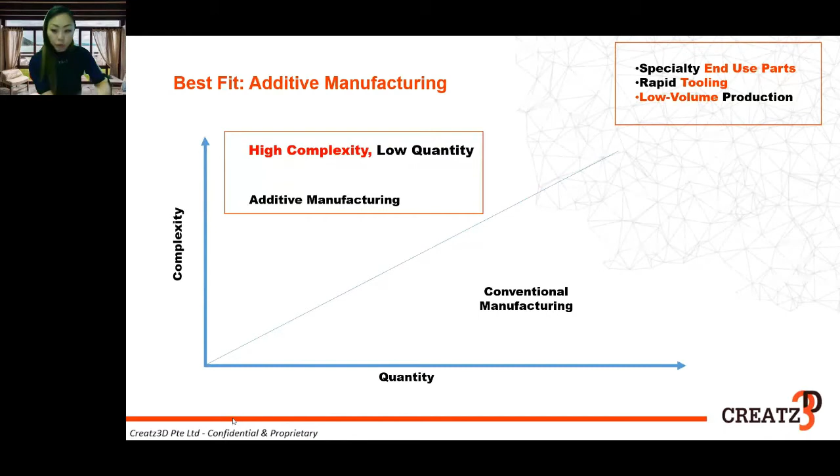Okay, so just to walk through the stages of product life, usually this is how we use additive manufacturing. In the past, people believed additive manufacturing can only be used for concept designs, prototyping, for very low or non-functional applications. But what we see today is there's a lot of demand coming from more test models, functional testing, even jigs and fixtures. I think jigs and fixtures is one of the biggest applications we see in recent years, with customers coming to us looking for low volume productions and all these things.

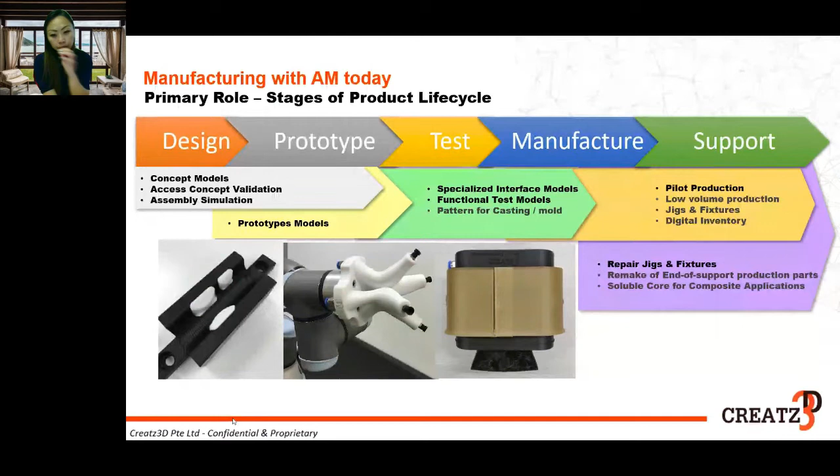Okay, so I'm going to go very quickly into three stories. The first story will give you, or at least the customers we're involved with, a changed mindset about what 3D printing is. The second story is we actually deliver more than what the customers expect. The third story is mainly on how we simplify the whole tooling request from our customers.

So quickly, I'll go into the first case study. We work with this company called Fidel Engineering. They are basically a tooling house. They produce a lot of jigs and fixtures, and they specialize in aerospace industries. So they came to us asking for a solution on how AM can be integrated for metal, because they're spending a lot of money just on mold forming for low volume, especially for aerospace industries.

So we came up with some of the pain points: it's very labor intensive, the cost is very high because mainly they have a lot of skilled workers, and the lead time is usually very long. They are restricted in terms of mold designs, especially for progressive stamping tools, where they need multiple molds. And if the metal sheet is very thick, the mold gets destroyed very quickly. So the requirement for them is how we can integrate AM or redesign their process for low volume production, and bring down the cost of tools as well as the time to market.

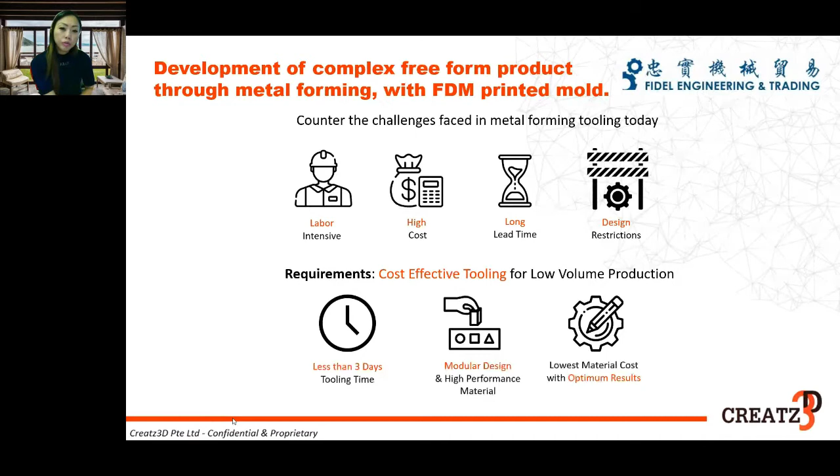So the top section talks about the traditional way of how they do their mold stamping - the molding, how they produce the mold. From machining all the way to forming the mold takes around 7 days, and they need 4 different types of skilled workers to do this. The process is actually very skill dependent, and if one of the workers is down, they're trapped with a longer lead time.

Whereas when we do the tool designing, basically we only need one designer and one operator. That's the maximum hours required.

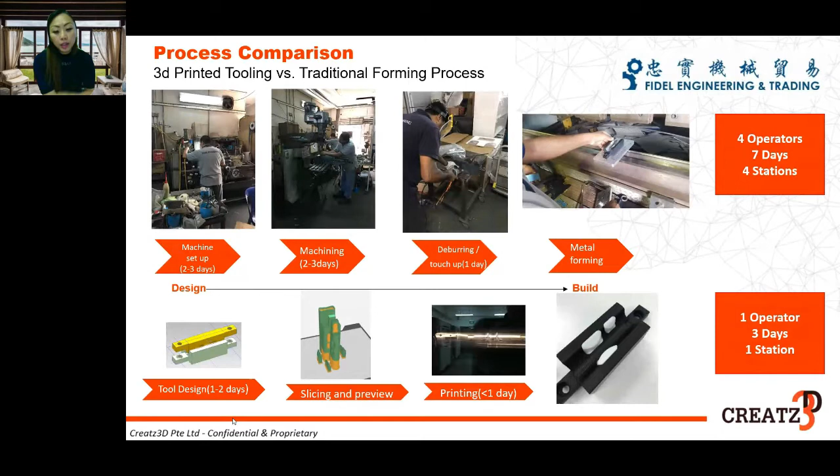After listening to what they want, we use Stratasys Fortus machines to produce this mold. The whole idea is to produce a modular mold - this is the final design. We understood that a certain section of the mold wears off very easily, and usually for whole metal molds, they need to dispose of the whole thing, which costs them. So we thought, why don't we design a modular insert? The customer was quite surprised that AM can actually do this - it had never crossed their mind that they could do inserts, or that it's usually very expensive to do this.

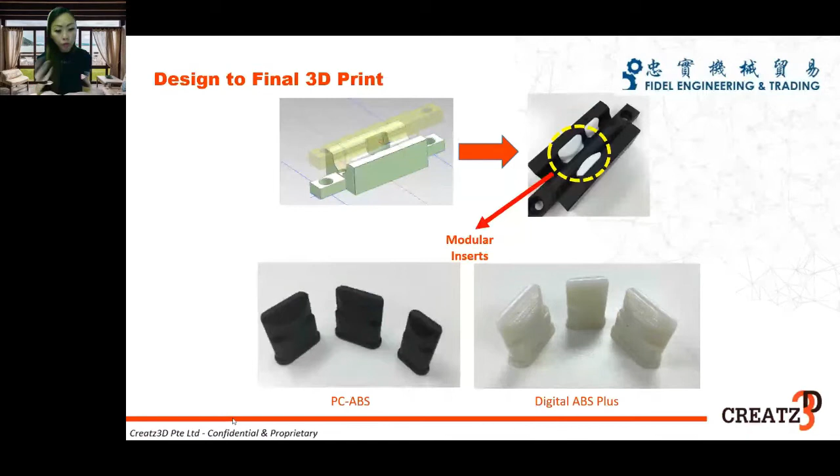So we produced two types of material inserts, basically to test which one would last longer. PCABS is a real thermoplastic - this material lasts longer, but due to its ductility, we may not get the curvature as much as we want, so PCABS is definitely not the best material. Digital ABS from Stratasys PolyJet machines definitely gives better forming on the sheet, but it's a little too soft. Overall, it's really all about the choice of materials. This application is really very interesting.

We did about 100 shots of stamps, and then we noticed that the mold starts to wear off a little bit, but customers are very happy because the parts printed are really within their own tolerance and very ideal for their own low production runs. Usually they only require maybe 40 to 100 sheets. During this whole process, we noticed that PC-ABS is probably not the best material to go for because it's too ductile, and we noticed some spring back. If given a choice again, I would rather choose polycarbonate, which is a more rigid material for these applications. But the whole concept is definitely adoptable in the whole process.

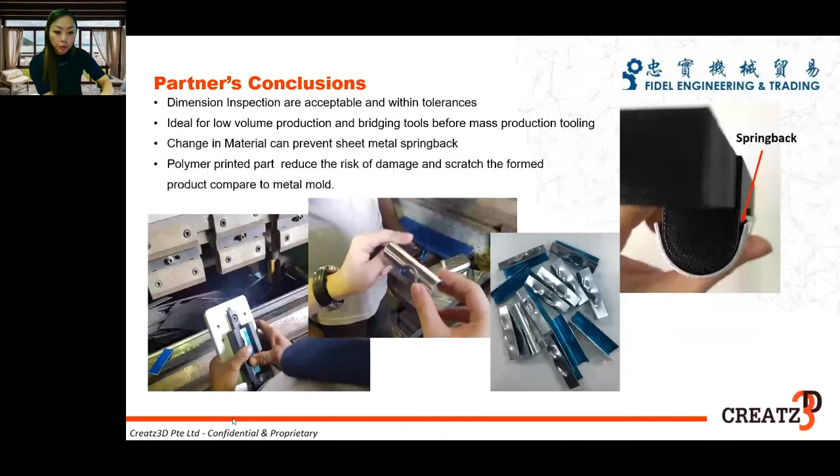So the next story is mainly on Universal Robots. Universal Robot approached us for a collaboration, back then about 4 years ago, so this project is quite some time back. They had a new UR10 back then, and they wanted to design a suction gripper for food packaging, but had totally no idea what they could produce. So they came to us and asked us to do a design for them. After understanding what the UR10 is all about, and that it can turn 360 degrees, we decided to do a multi-axis suction gripper for them.

Traditionally, this is how end of arms look like. It's usually very bulky, very heavy, with a lot of sharp edges, very rigid, and not so adjustable. Usually the payload capacity includes the whole end of arm weight. So for example, about 10 kg payload, and easily the end of arm will take about 3 or 4 kgs. So part of the requirement is to reduce the payload itself.

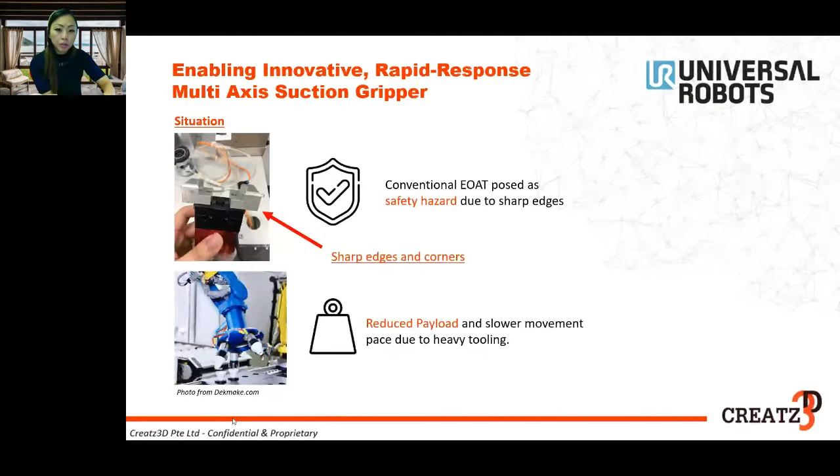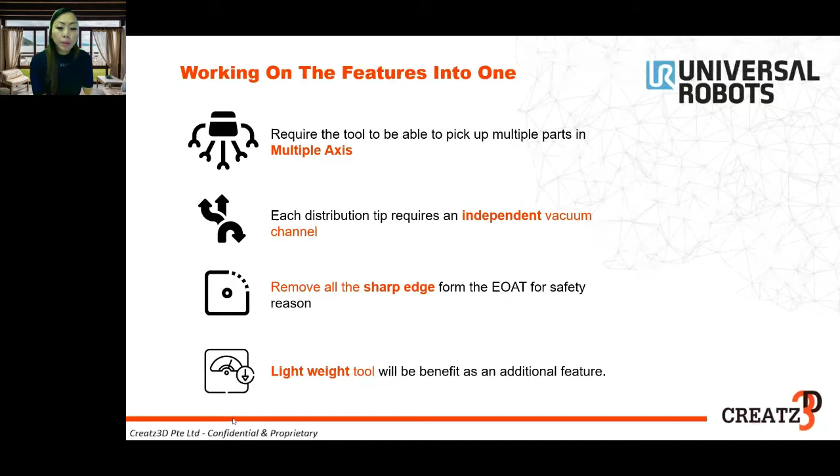In order to show that 360 degree feature, as I mentioned, we intended to design something multi-axis that can turn to demonstrate that capability for them. We actually chose the Stratasys Fortus 450MC to print this, because it can print in polycarbonate. This is how the concept design works. The whole process actually took us about 1 week to come up with the final design.

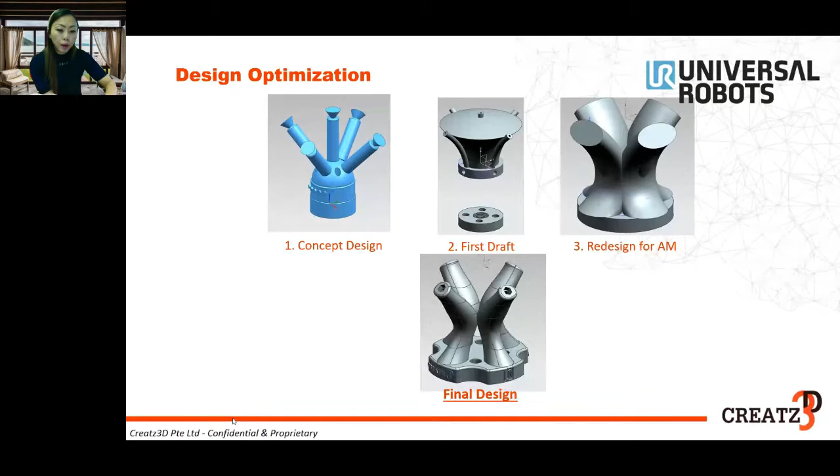We wanted to optimize the whole design based on how FDM is supposed to work. Usually for professional printers, there would be a lot of support material generated in the air channels. So if we do it at a 45-degree angle, we can actually eliminate the support material, and we worked on the toolpath itself to produce a tighter Z-axis, so that we don't need to compensate for air loss.

Of course, having very powerful software like Insight helped us a lot in terms of toolpath manipulation.

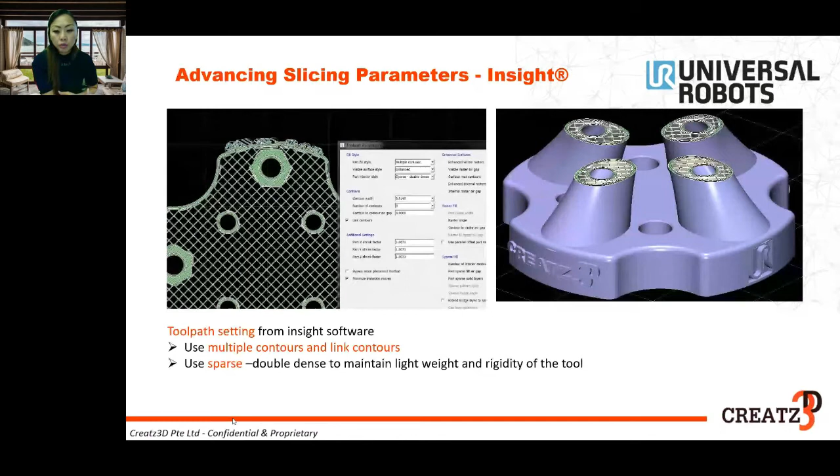Using all these features, we managed to come up with the part itself without support material generated in the center. This reduced the time to market, and we actually programmed it to embed inserts so that it gives a tighter feel, with no need for users to plug in, plug out, and all these things. So we tried to reduce the amount of removable components.

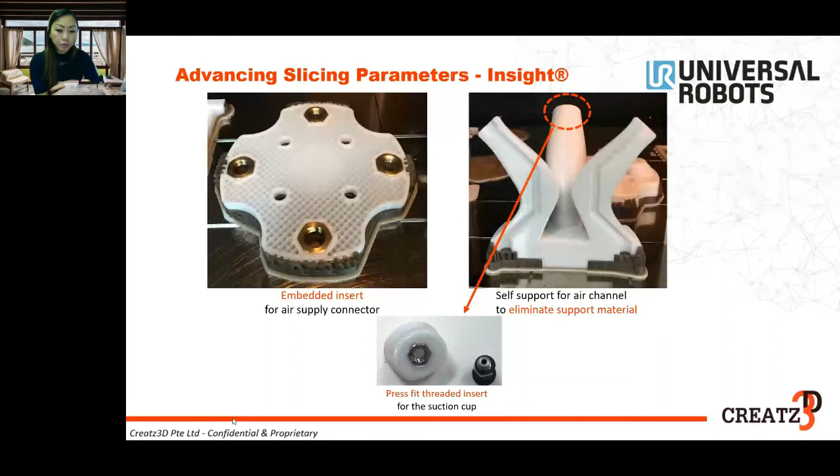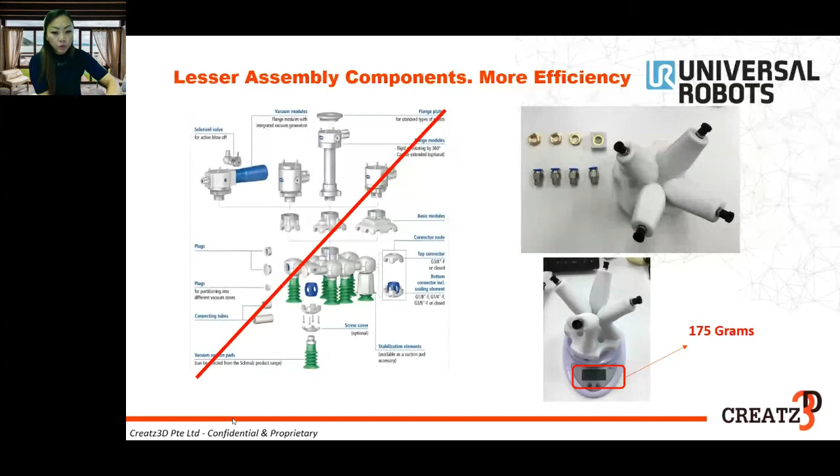So this is how it looks like. Traditionally, one end of arm will take about 200 different components to make it up, and you need a lot of experience to know what to draw, what to include into the whole end of arm. But in this case, we had zero experience designing an end of arm, and we came up with this design in one whole week. We brought down the weight of the end of arm to 175 grams. So of course, the customer UR is definitely very, very happy with this design.

So this is a short video on how it's being used.

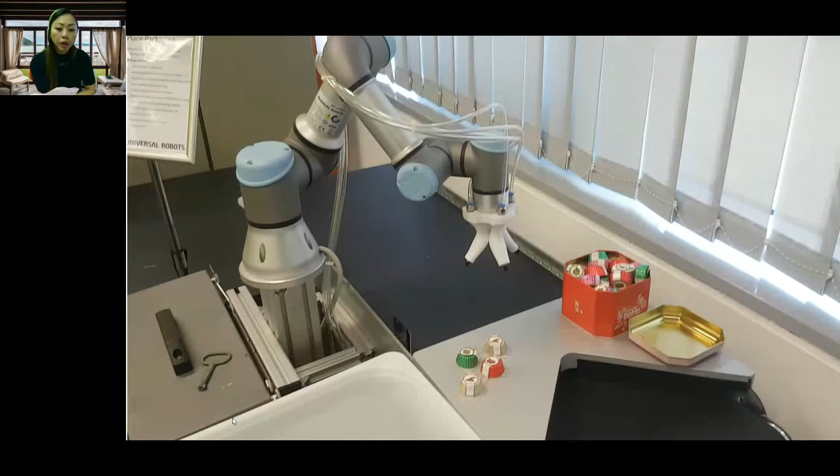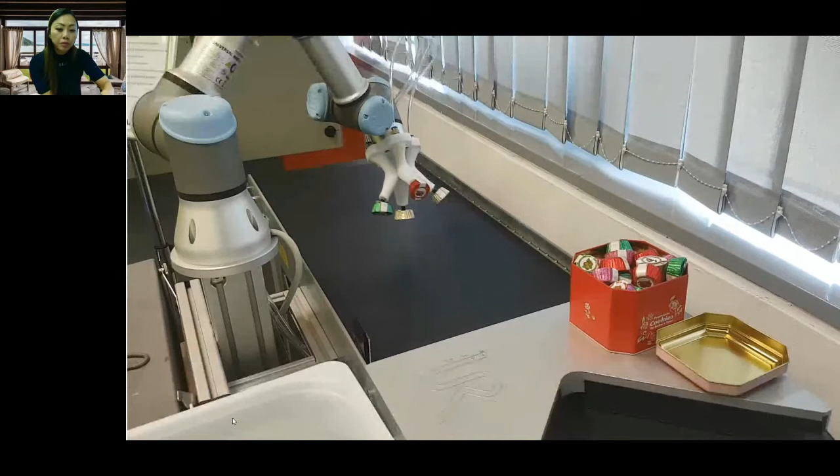I think after this final design, we actually did some further modifications on the end of arm to include a camera on the side. So we created something that is attachable and detachable for them. Yeah, this is quite impressive.

So I'll move into the third project, and this third project is actually very, very recent. We can't reveal who the end user is because we signed an NDA with this company, but they came to us with a problem involving a labeling gripper.

So they bought a lot of robots in the whole process, and because they're dealing with consumer products and with e-commerce today, customers are buying different types of items in a single order. So for them to deliver to customers, sometimes when they ship overseas to Singapore, they need to do relabeling, and this relabeling can be quite labor intensive. At the current moment, all the relabeling, I'm not so sure for other countries, but for Singapore itself, I'm quite sure they are all using manual labeling. So it can be quite labor intensive and it takes a very long time. And if the distribution is different items in a single box, they need to make sure the labels are all available and labeled on the go.

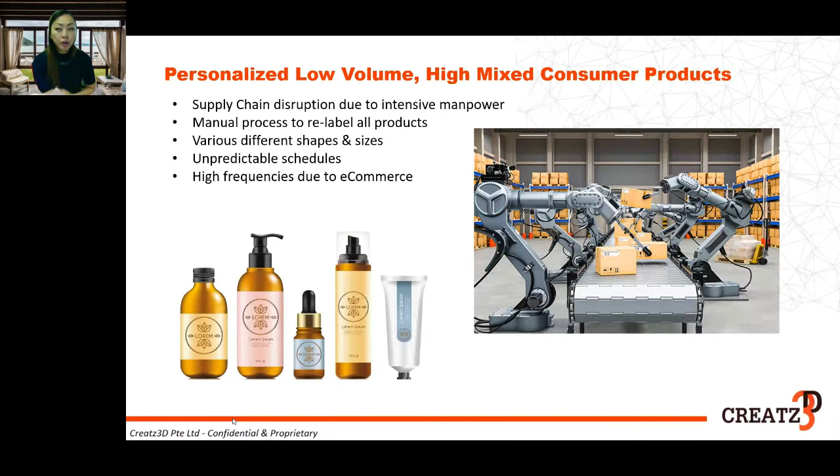So we decided to make use of whatever resources and whatever we learned, and we came up with an adaptive robot gripper that is able to grip different types of labels. They gave us about 4 labels, so you can see it's quite challenging for us to come up with a label gripper that is able to do all these types of labels, since the bottles and shapes are all different.

We locked down to 3 different types of bottles, or rather, one bottle and 2 types of tubes with different width and length. But still, for each type of tube, we need to make sure they can label at the edge of the tube as well as the center of the tube. The tube is actually lying down and the bottle is standing up.

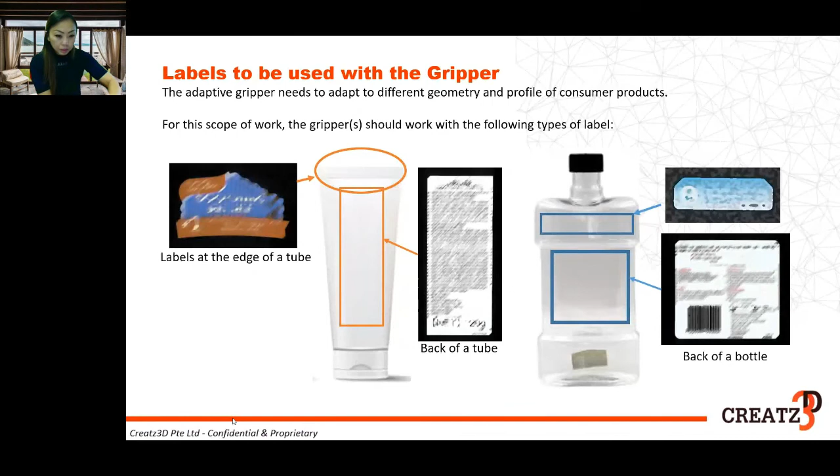Maybe it's easier for us to show you how it looks like. We came up with the design in 15 working days. This robot is able to adapt to the shape of the bottle or the tubes when it comes down.

We make use of a few different types of materials, mainly nylon 12 carbon fiber as well as TPU. We made it modular and easy to change, so every component in this gripper is easily replaced and removed — you just change whichever part wears off. Even the suction pad is also 3D printed.

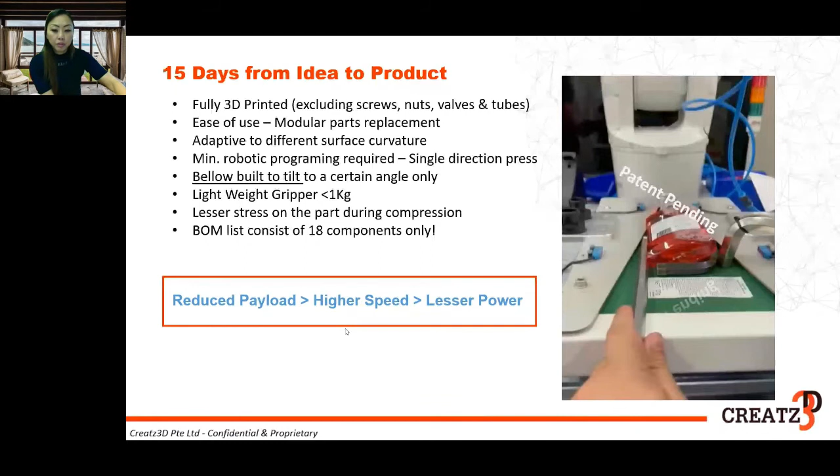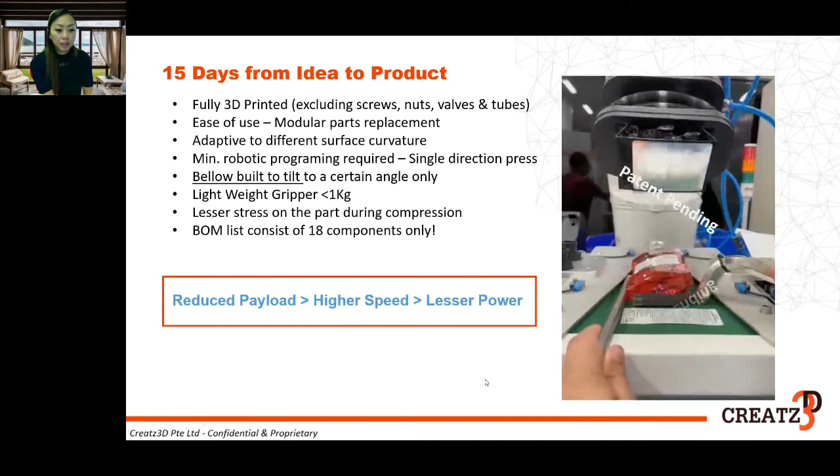Maybe I can show you the video. I can't show you the whole process, but we designed two different types of grippers, one for bottles and one for tubes. This is the one for the bottle.

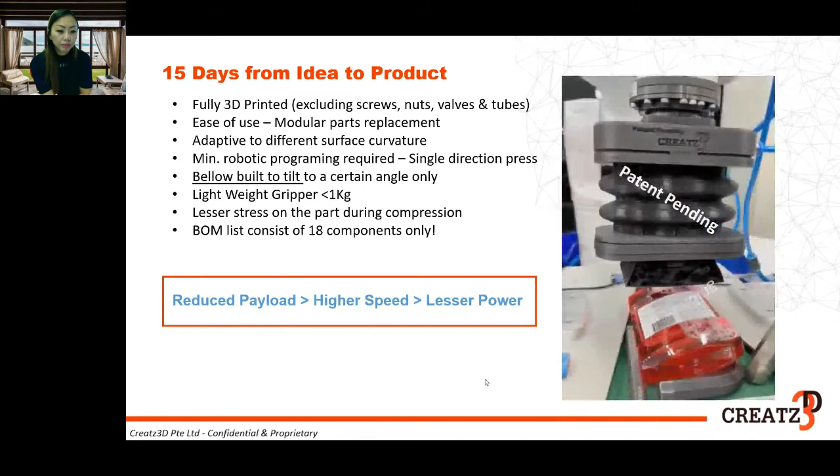We brought down the whole weight to less than 1 kg. The robot that they are using is an ABB robot, which has about a 6 kg payload, if I'm not wrong. So with just one movement, we are able to comply with the customer requirements, and of course, they are very, very pleased with this.

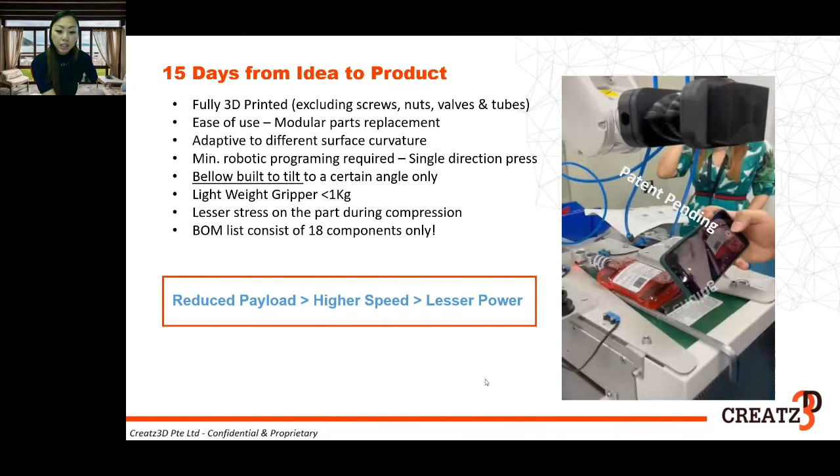The whole assembly only consists of about 18 components. I would say this is really something interesting, and we're going to roll it out after we get the full patent for this. So that covers my full presentation slide — if there are any questions, feel free to let me know.

Hi Sally, thank you so much for that, that was really great. I was actually mid-typing a comment to say that the ability to adaptively go to different surfaces is really impressive, and you can definitely see how that would be such a valuable thing, to not have to reprogram and retool for a small change in a product line. We've definitely got a couple of questions, so please feel free to go over to the Q&A tab and put in any other questions you might have, or even go upvote some of the questions you like the sound of.

So the first one is, what type of software tools do you use to support your design process? And, what is the highest upper temperature used for polymer-based AM for mold and tooling?

Sally? Yep. Hi, yes, Sally. Yes, I'll ask the questions, you don't need to worry about the Q&A box, that was more a message for the audience. So the first one was, what type of software tools do you use to support your design process?

Oh, we use a lot. We use Rhino. We also have Creo, but mainly we use a lot of Rhino.